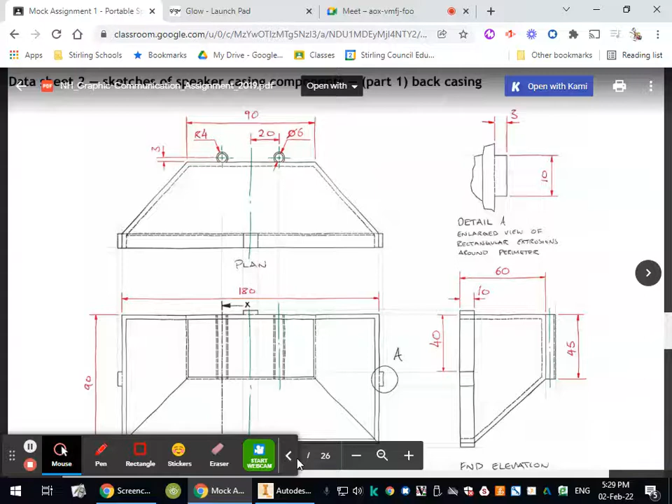Hey, so this video is going to take you through creating part one of the 2019 graphic communication assignment. That's for Higher, which is this component here. And we've also got this exploded isometric that helps us understand it a little bit better.

So I guess the key thing to do before you start is to make sure you properly understand the drawing, that you've read all the little annotations, that you've looked at the dimensions and properly understood where everything's got to go, and that you have a clear picture of the shape of it in your head.

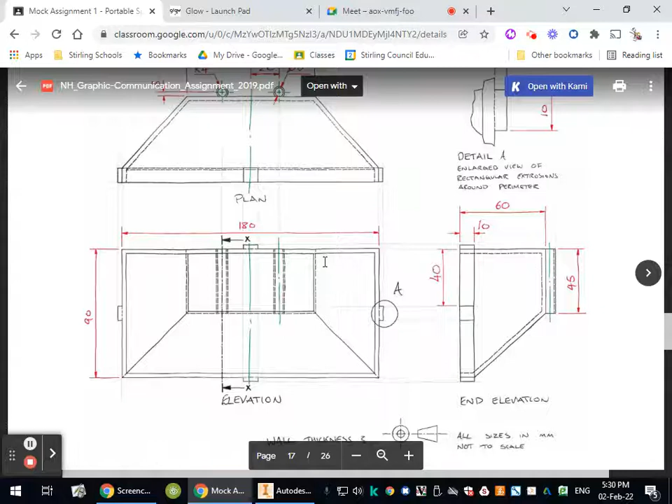So as we can see, this object has a rectangular profile at the front, and would appear to have a rectangular profile at the back, but we can see that from the front to the back it slopes up, and also from this area it gets narrower. We can see there are these kind of details at the back, which are cylindrical tubes spaced equally across the center here.

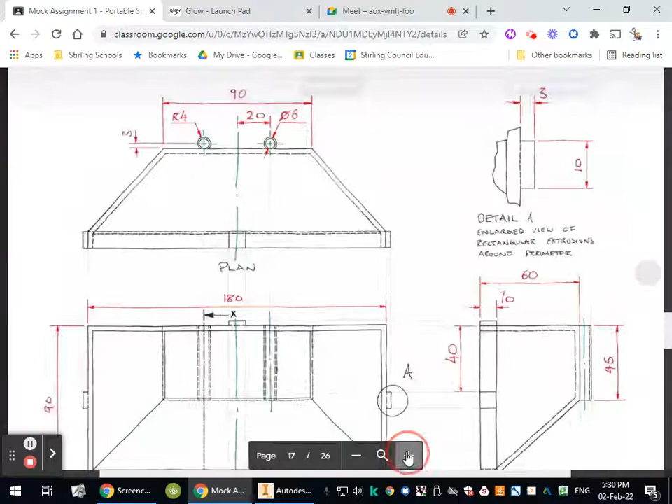And we've got some dimensions here that indicate to us the central hole, the actual hole that goes through, is tangent to the back edge of this piece here. So the outer circle needs to kind of overlap with it a little bit.

There are some detail views that give us the information we need about these little bosses that stick out the sides. And we also have an annotation here that says wall thickness 3, which is usually a good clue that you're going to have to use a shell.

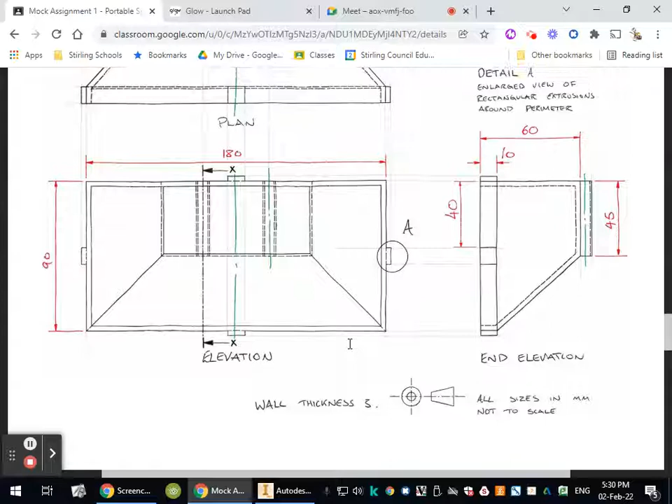And whenever you use a shell, it's really important to remember that a shell will try and shell all of the features that are there at that point in the model's creation. So these kind of circular features at the back and these rectangular bosses around the edges are things that we don't want to be included in that shell process.

So it's important that we create the main part of this, which I think will be from a loft first, so a mixture of probably an extrusion and a loft. And then after we've done that, we shell that part and then we add on these bosses.

Now there's also a couple of symmetrical features, like these posts at the back are symmetrically arranged, as are these bosses. So if we're clever and we start our first sketch so that it's dead on our origin and it's centered, we should be able to use our origin work planes to use the mirror tool to copy those features from top to bottom and side to side, hopefully reducing the amount of time that we need to take to do it. It's not going to make a huge difference, but everything that helps might as well.

So let's start quickly. We're going to start with this 180 by 90 profile here for the front, and then you'll see that that extends 10 millimeters back where it's straight before the loft occurs before it goes back to this back surface.

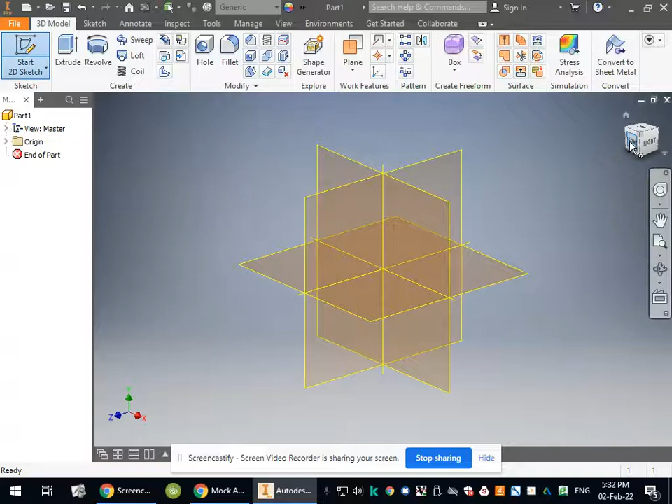So in my part file here, I'm going to start my sketch. I'm going to think about the orientation of it. So I want it to be on the front plane here. And there's a kind of weird quirk with Inventor that sometimes it flips that on its side, but it hasn't today, so that's fine.

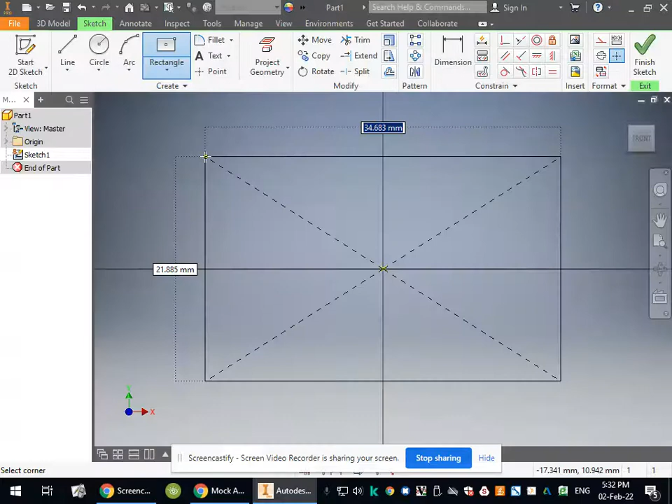And a good way to get it centered is to create a 2-point rectangle, which means that we can click on the center and then click out here defining the sizes, which is 180 by 90. This just means that that front surface is dead center over my origin.

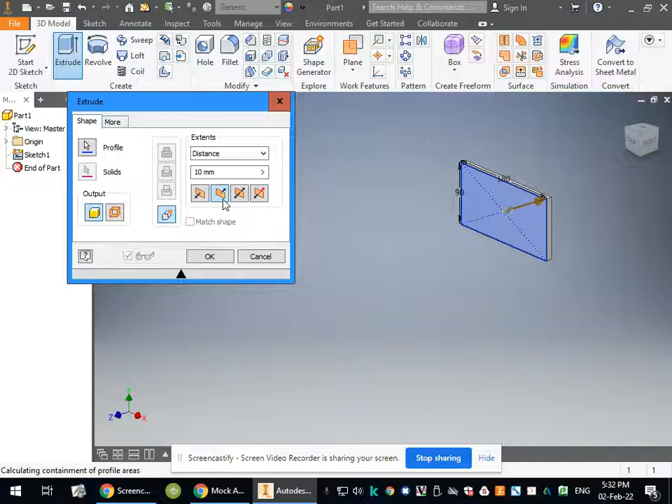Now when we've got that, we'll just extrude it 10 millimeters. And it won't matter hugely which direction, but I'll make it project backwards so that that's on the plane here. And that's that first little bit.

So the back surface of that is going to form the face upon which we will basically create our first sketch or first profile for the loft. And the second profile for the loft is back here, 60 from the front. So that means it has to have a plane which is offset 50 from the back face of that first extrusion. So if we go back here, I'm going to create a new plane.

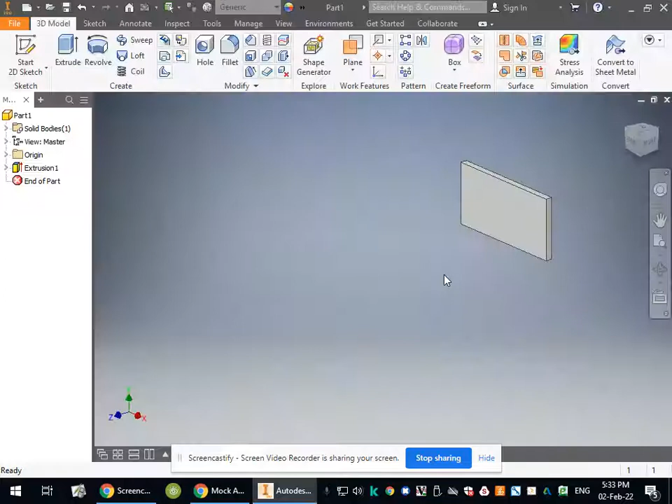Here we go, and we're going to offset that by 60. I'm going to start our sketch on this plane here, and we want a rectangle which is aligned with this top edge of that front surface there.

So we want to make sure that we're getting a snap dot so that we can snap onto it. And if we aren't, we can use the project geometry tool, project that line, and then select it and make it a construction line, so it won't form part of the actual profile. It'll just let us snap onto it.

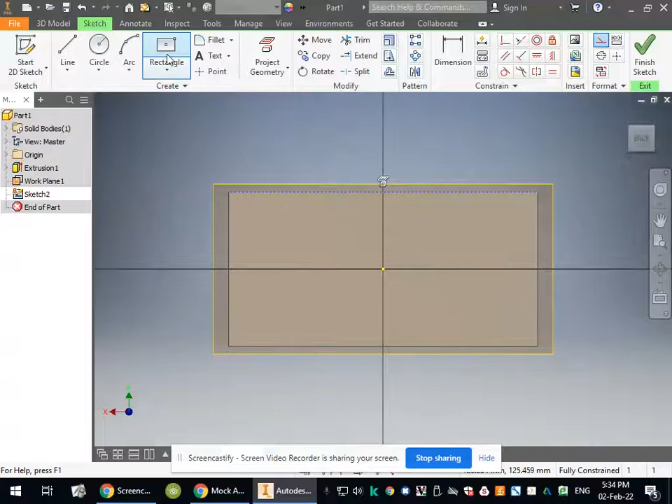Now, it's probably easier here to use... well, it doesn't really make much difference. We'll use a center point rectangle - a 2-point rectangle would work fine too. But I don't want to snap onto the center point here because I want to be able to position this and dimension it so that it doesn't think its center is here, which is what it'll do otherwise.

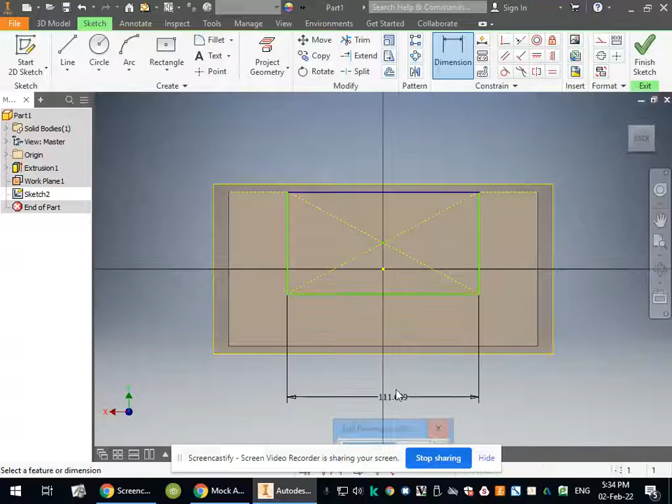So here we're going to give that a dimension in that direction of, let's have a look here, 90. It says it's 90 wide. So we'll just hide that - 90.

You'll see it's kind of nudged itself off center anyway, but that's no big deal, we can sort that out. And it's 45 high. So we'll dimension that.

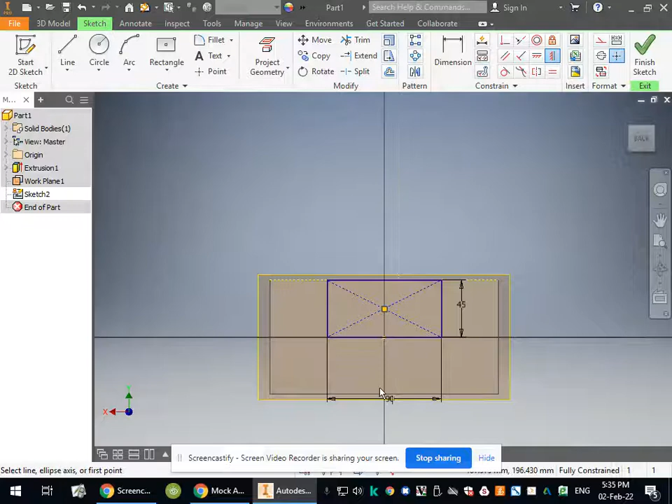And to get this back on center, we could probably just use our constraints here. So we just constrain the center of that to the center, using a vertical constraint to constrain those 2 points.

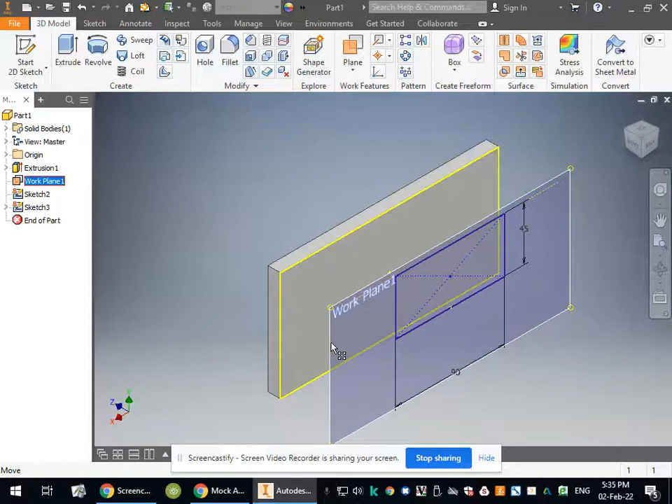So now that we've got that back profile, we simply need to create a profile on here, which we should be able to do just by starting a sketch on it, and then using the project geometry tool - or we should call it project edge, but we can call it project geometry. I'm going to make this a work plane. I'm just going to right click on it and make it invisible now, so I don't need to see it.

We can now do our loft from this profile here to this. In fact, you probably don't actually need to do a sketch and identify the profile - I think you can just do it with the face of the surface, sorry, the face of the feature. But either way, it gets us to where we need to be.

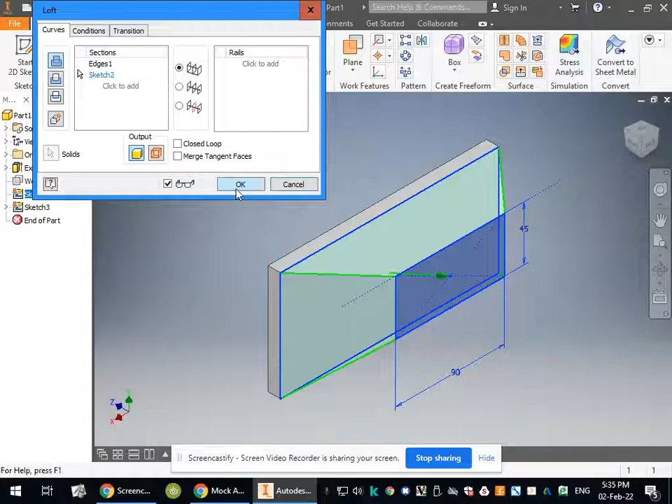So we've now got that. I'm going to just make that sketch invisible because we don't need to be able to see it.

And so if you ever want to check things, it's not a bad idea to just use the measure tool, which you can use M to select, and you can just check some obvious sizes, like that one's got to be 60, so we know that that's 60. We could go around and check the sizes just to make sure, but I know they're right, so I'm not going to bother with that.

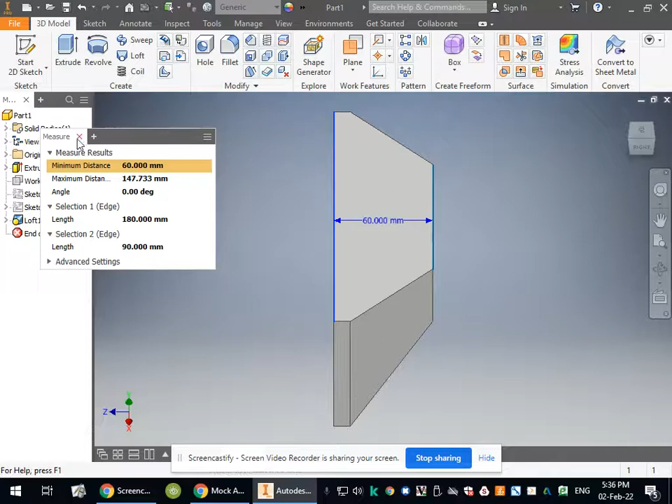Now, the next thing we need to do is our shell before we add these other features. So we're going to use our shell tool. We're going to select that front face to be removed, and we're going to define the wall thickness as 3.

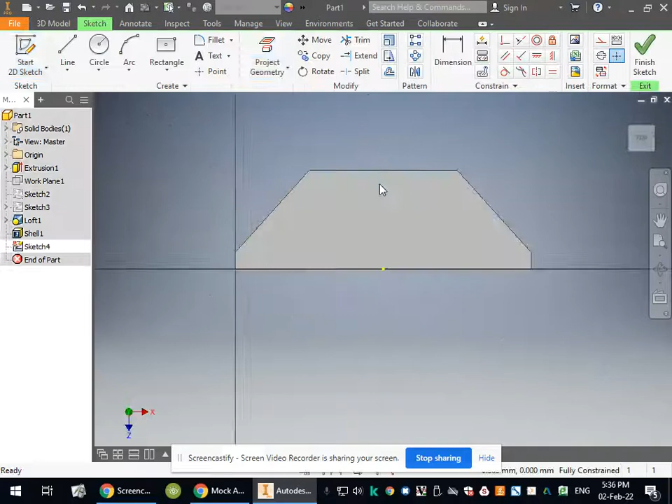Having done that, we can start adding these other features that need to go on. So we'll start with these cylindrical things at the back here. What we'll do is we will just start off with a circle. It's not going to matter hugely where we place this just now - I'm just going to add it so it's kind of tangent to that curve.

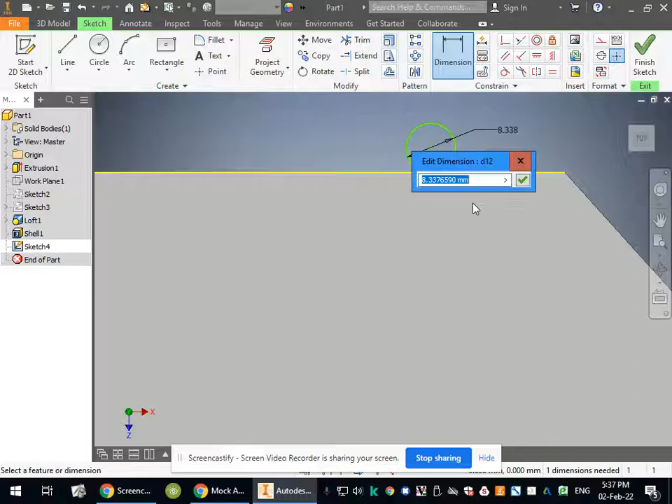This is going to represent the center, like the middle hole, which has got a diameter of 6. So we'll dimension that 6. And if it pops away, if it's not constrained to the tangent, we can use the tangent constraint to just grab that and constrain it there so it knows it has to be - but I think it picked that up already when I was creating it.

We then need to add the dimension to position the center of this from the side. So the position of this from the, well, it's actually from the middle, so I guess we could infer it from the end. If this is, what is it, 90 wide in total, that's going to be 45 to there.

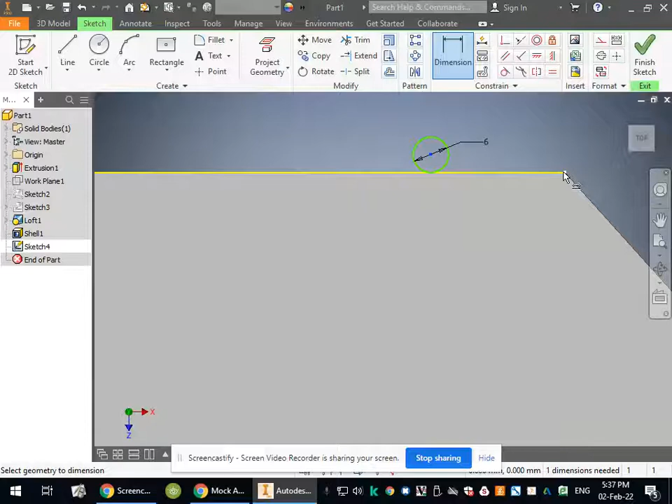So that's going to be 25 from the outside edge, because that's just an easier point to dimension from. But it doesn't really matter, you can dimension it from the center. So we'll just do a dimension for the center of this to there. We're going to make that, what did I say, 25.

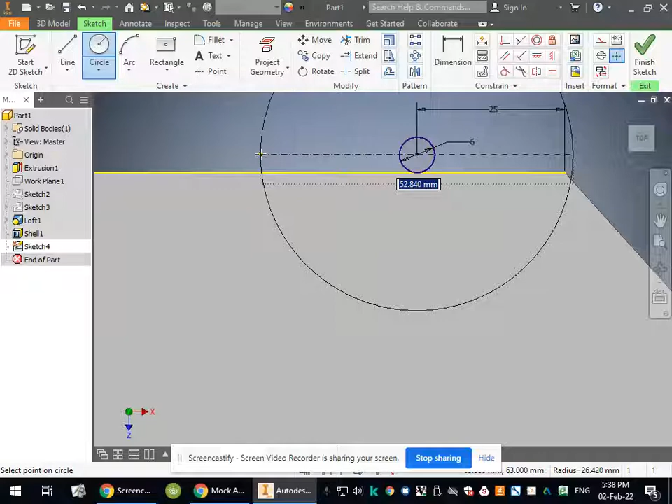And then make our second circle, which is going to give you the outside part of the profile. If you look back, we'll see that the radius is 4 because it's not a full circle. So it's got R4, which means if we're adding a diameter here, we'd want that to be 8. We'll have this extra bit left over, but we don't need to worry about that because it's only a millimeter sticking in, so it's going to get lost inside the 3mm thickness of the wall. We don't need to trim that away.

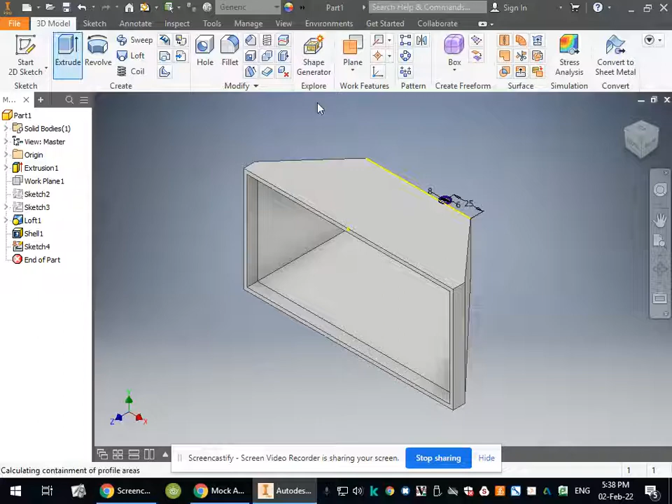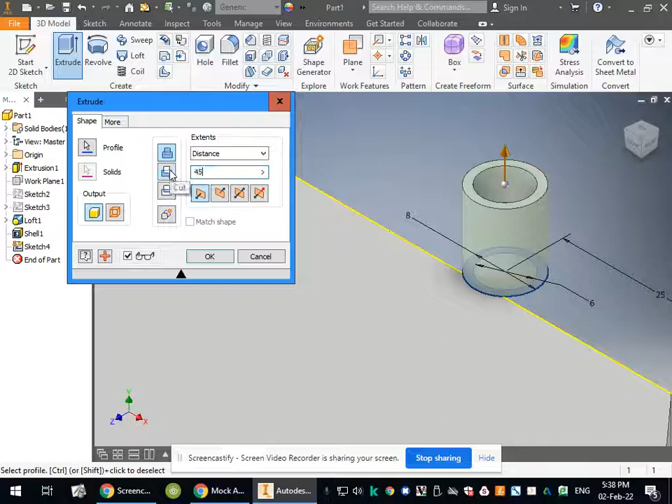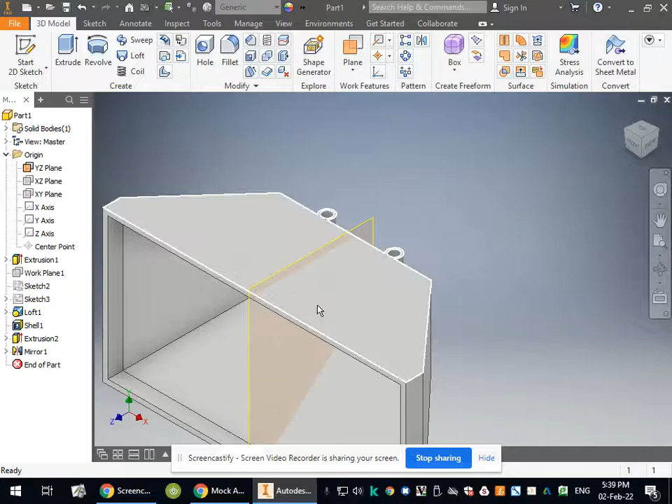So we can finish the sketch and extrude that, because it always makes sense, if we're going to use the mirror tool, to do that with the feature rather than the sketch. We're going to do a distance, and we could either define the distance by going in and clicking the edge we want it to go to, or just see how far it goes down. It says here 45. So 45 - allow me not to change the direction. There we go. Now if we go back to our origin, we should be able to make that plane visible in the center, so we'll be able to mirror that feature using that plane. That saves a little bit of work. We'll leave that visible because we'll use it again when we do the bosses at the sides.

So down here, this rectangular boss is 10 up and down the way. It's obviously 10 side to side because we can see it matches the 10 there, and it's 3 deep. Its position is 40 down from the top edge.

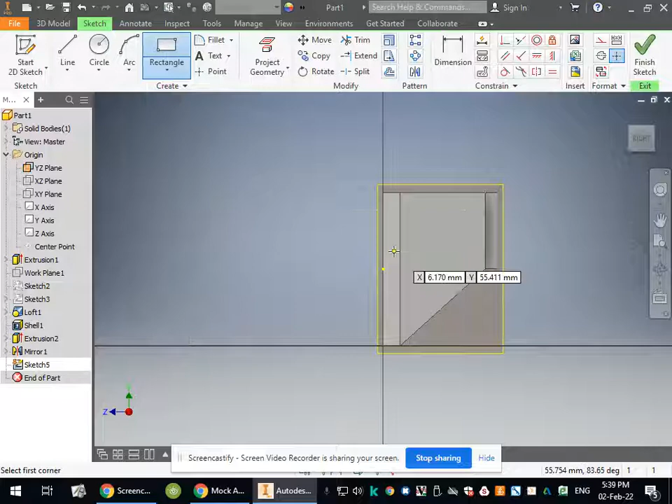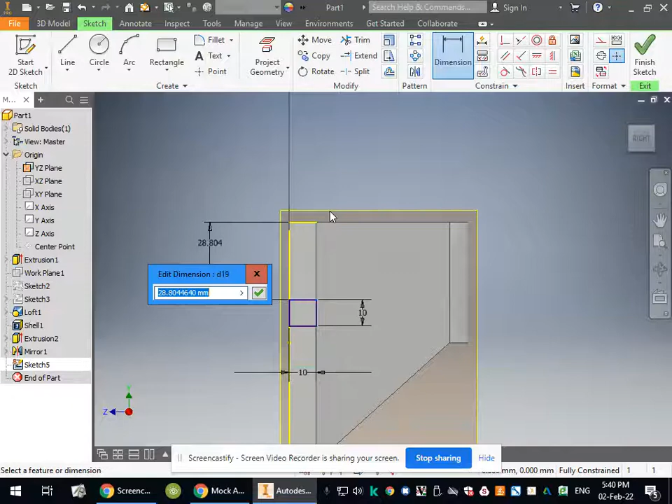So I'm just going to start a sketch on this face here, and we're just going to draw a rectangle - probably easier to do a 2-point rectangle here. We'll specify that it's got to be 10 by 10. Then we'll dimension the corner at the top to the top edge here - try and get it right, try that again - actually we can just grab that surface there. And 40, so we're going to specify 40 millimeters.

Finish, extrude, 3, enter. And then we'll just mirror that across that central plane that we've got.

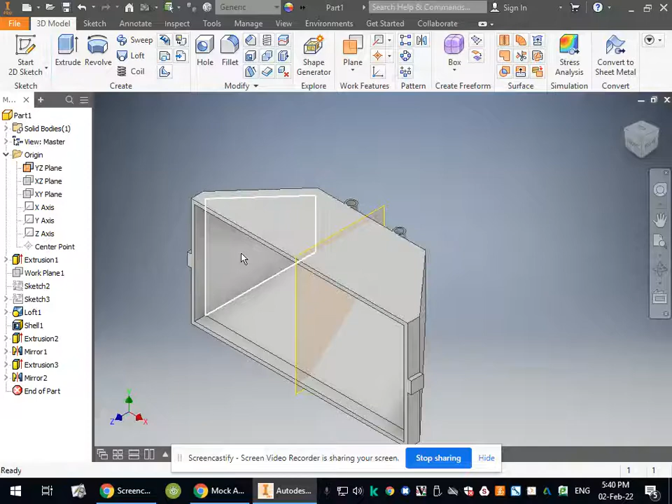And then we will do the same thing with that plane there. So we're just going to make that one visible so we can use it when we do the same one on the top. Start our sketch - I'll actually do it on the bottom because it's already got this kind of 10 millimeter wide surface, which makes it easier to tell that it's right. We could do this as a 2-point or a 3-point rectangle, it doesn't really matter. Dimension it correctly.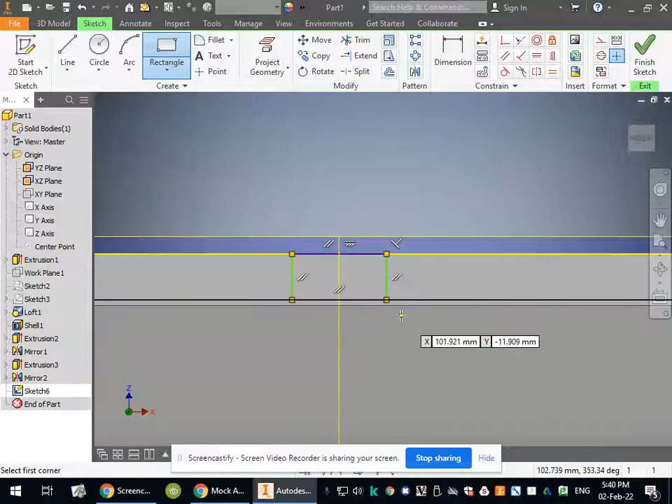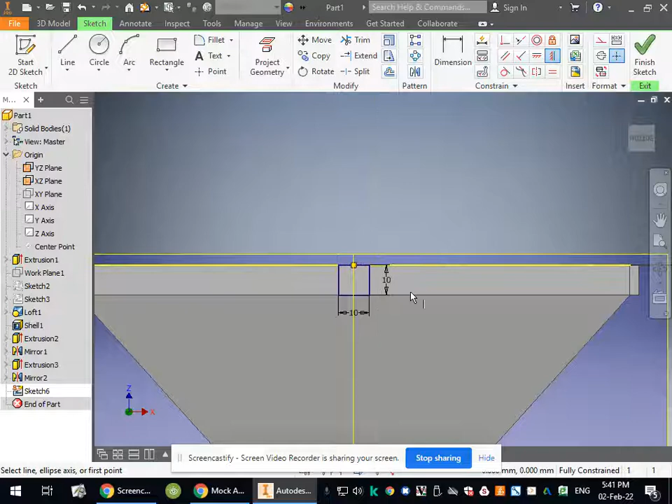Okay, I accidentally snapped that onto the wrong thing when I created it, so I'll just do it again - 10 by 10. We could position it in a couple of different ways, but we'll just do a horizontal constraint between that and that, which pops it bang in the middle. And once again, extrude 3 millimeters.

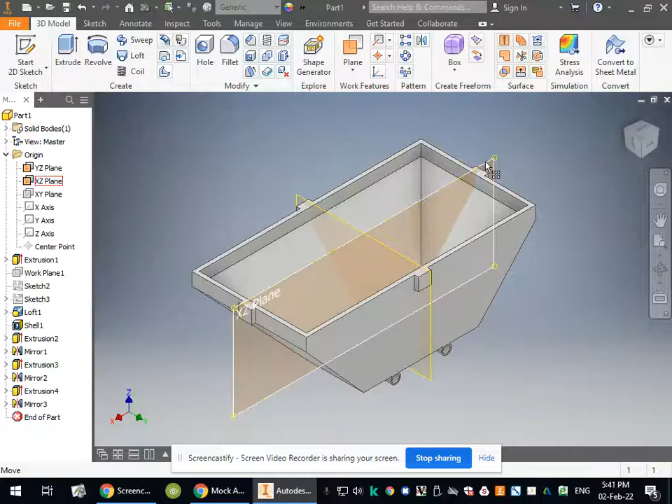And then we can use that plane to mirror it across - that feature, that plane, and that's it. We can just make these planes invisible now because we don't need them to be seen.

And so now we've got our object. As I said before, you could go back and use your measure tool, the M shortcut, to just check some of the dimensions and make sure you've not made a silly mistake. I'm quite happy that I've done that all correctly, and looking back over this, there are no other features that I've missed, so that part's finished.